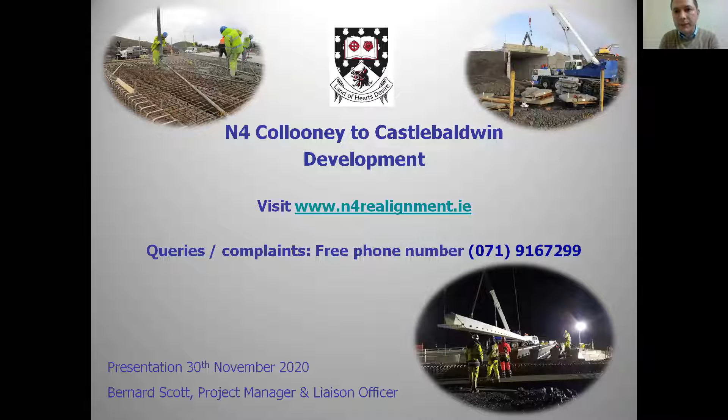I'm delighted to be in a position to give this presentation at this stage of the N4 project. I suppose development of schemes of this nature, such as this N4 scheme in the northwest of Ireland, through planning, appraisal and onto construction, requires a huge amount of work, commitment, perseverance, diligence on behalf of everyone involved. And I would like to extend my gratitude to all concerned for their efforts in getting the project to this

stage. For my presentation, I'm going to give you a brief background on the project, and we'll touch on the following headings: the project location, project description, its status, existing conditions, the project background, Phase 5 enabling and procurement, and the Phase 6 construction key stakeholders.

So the proposed scheme constitutes the remaining portion of the N4 in County Sligo requiring improvement. The project should provide 14.7 kilometres of Type 2 dual carriageway between the existing dual carriageway at Collooney and the end of the Curlew bypass, as Rona said there earlier. This consists of 2.7 kilometres of the existing single carriageway being upgraded to a Type 2 dual carriageway from the N4/N17 roundabout to Doorly, and 11.2 kilometres of offline Type 2 dual carriageway between Doorly and the proposed

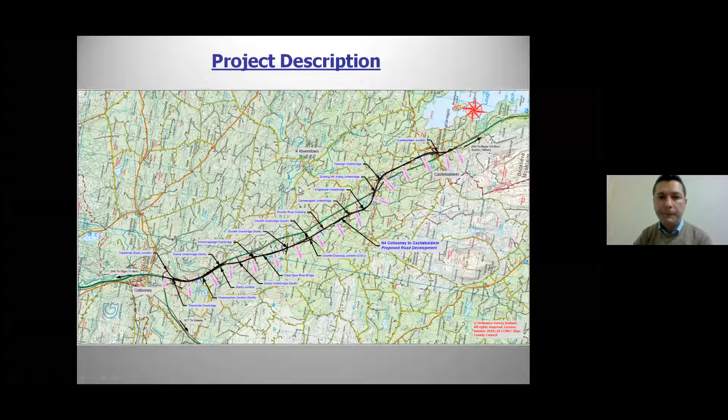So this image here shows the roundabout at Toberbride, the N17 coming in from the west side, the existing N4 dual carriageway coming in from the north. This is the existing N4, which will be upgraded to a Type 2 dual carriageway. And we have an east-west link, which was a link road going into the Tuberbride Business Park, which will now become a live public local road, which is referred to as the east-west link, which will provide a link over to a parallel road.

So this is the continuation of the parallel road, which is the Eastern Parallel Link Road. It's currently live to the national road traffic at the moment. It ties in with the existing N4 just at the top of the photo there. There's an underbridge coming across at this location to link up with a roundabout, which serves as a link to the Western Parallel Link Road. And both of these parallel roads are required to serve the local landowners and the areas surrounding this, like Riverstown, Clunamahan, and surrounding townlands and hinterlands.

This is the existing N4, which will be upgraded to a Type 2 dual carriageway. This photo was taken approximately in the beginning of November. So you can see construction is ongoing at the moment to get it across this underbridge.

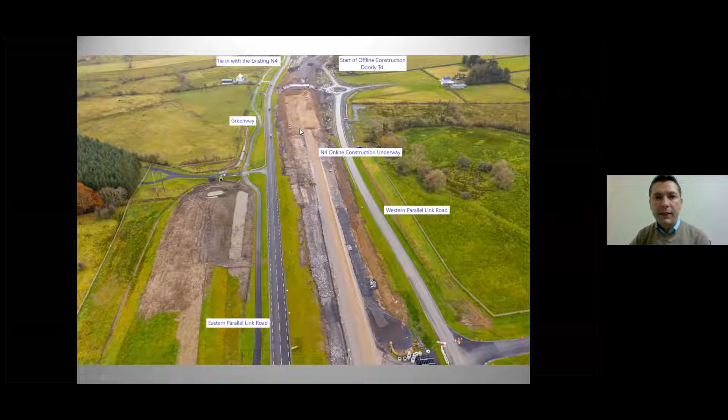So in terms of cross-section, the cross-section of the N4/N17 from the N4/N17 Toberbride roundabout to the Castlebaldwin junction should be a Type 2 dual carriageway, which has a capacity of 20,000 annual average daily traffic.

The cross-section from the Castlebaldwin junction to the existing N4 tie-in, which is approximately 0.78 kilometers, shall be a type 1 single capacity of 11,600 annual average daily traffic. The type 2 shall consist of two 3.5 metre lanes in both directions, separated by a central median, which contains a double-sided barrier. There is also a hard strip of 0.5 metres and a hardened verge of 1.2 metres on each side of the carriageway.

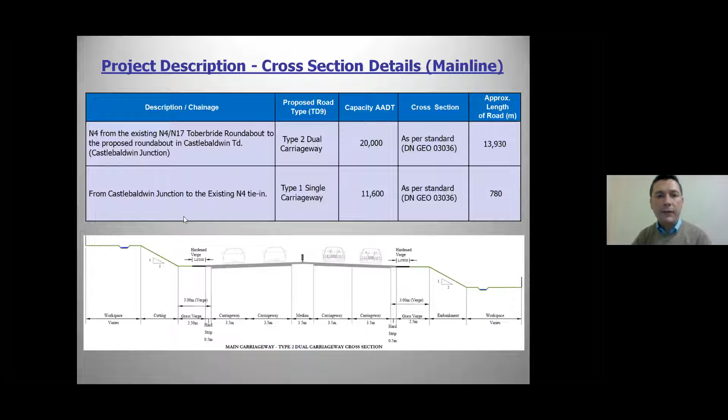To allow for breakdowns, parking bays will be provided at intervals along the alignment. These parking bays shall be 20 metres in length by 3.5 metres in width, with 40 metre lead-in tapers and 25 metre lead-out tapers. These will be evident in the drone video, which will be shown by Sean later on in the presentation.

So the project status: the project is currently at phase 6 and it's been developed in accordance with the TII project management guidelines, or Transport Infrastructure Ireland's project management guidelines. These guidelines provide a framework for a phased approach to the management and delivery of national road projects. There are 8 phases, phase 0 to phase 7 at present. And as is mentioned, this project, I'm glad to say, is at phase 6 at the moment.

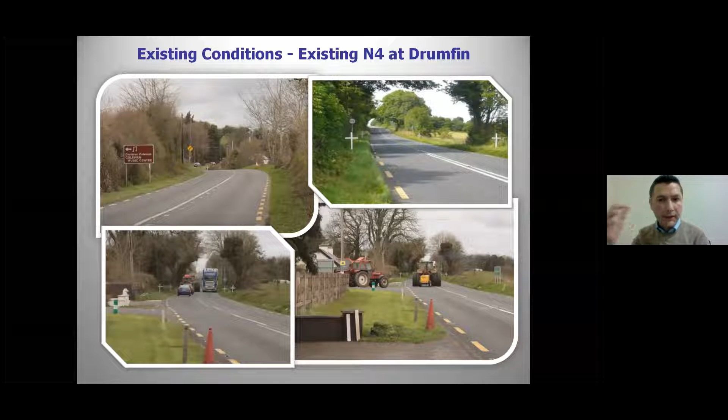There are approximately 70 houses with direct access onto the existing road. And more dangerous than that, there's approximately 160 field entrances serving land holdings along this stretch of road. So some of the key objectives of the route are to significantly improve the safety of the road, which has unfortunately seen over 30 fatalities in the last 40 years or so, which are evidenced by crosses that were erected some years back by an action committee.

Another objective is to provide a corridor of transport infrastructure that will encourage and support investment and employment in Project Ireland's National Planning Framework designated Regional Urban Centre of Sligo in the northwest. It's also an objective to improve journey time and journey time reliability, to improve road-based transport, quality of life for residents, and improve accessibility to work, education and other activities, and also to improve conditions for pedestrians and cyclists.

In terms of the project background, planning and land acquisition, all statutory documents and preliminary designs for the proposed development were developed by the National Road Project Office of Sligo County Council and lodged with An Bord Pleanála in December 2013. Following a 3-day oral hearing in April 2014, the EIS and CPO were confirmed in July 2014 without any modification. Sligo County Council confirmed the scheme in August 2014 and following approval published the notice to treat and the notice to enter.

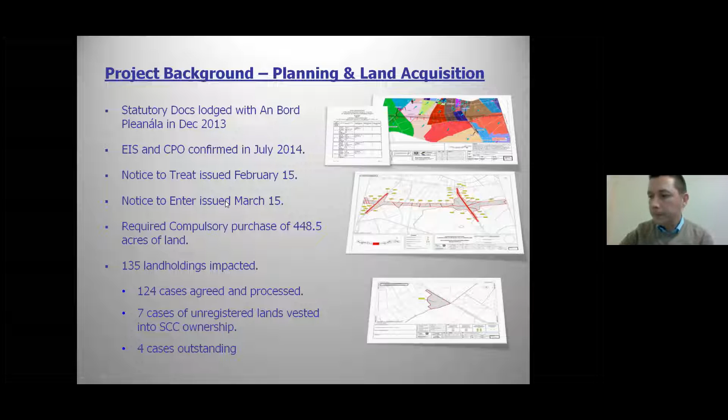In terms of advance works, following An Bord Pleanála's confirmation of planning, Sligo County Council National Road Project Office continued to manage these. Possession was taken in Q2 2015 to enable advance works to commence, and all necessary advance works were prepared, tendered and managed directly by Sligo County Council's National Road Project Office and completed from 2015 to 2017. They included fencing and clearance, house demolition, archaeological testing, ground investigation, ESB 110 kV pylon and 220 kV pylon construction.

The fencing and hedge clearance contract was completed in Q3 2016, and this included approximately 40 kilometres of timber post and rail fencing, approximately 290 agricultural gates, and all necessary tree and hedge removal works. So as part of the scheme, there were 16 houses required to be acquired, mostly along the online section. 12 have now been demolished and 3 are now boarded up for resale post-construction, and we have 1 that we're awaiting vacation.

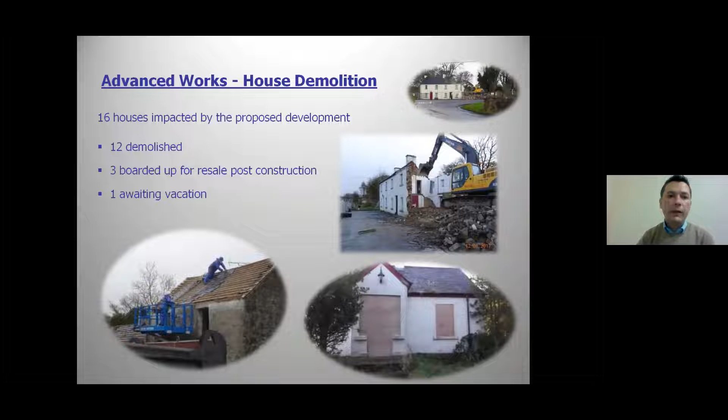In terms of archaeology, as you probably all are aware, Sligo is extremely rich in archaeological features. So advance archaeological contracts were carried out on the CPO lands from Q3 2016 to Q1 2018. These contracts resulted in the discovery of 35 archaeological excavation areas, mainly ranging from the prehistoric to the early medieval period. 3 large-scale sites were discovered, 2 of which were highly significant archaeological sites, consisting of prehistoric, Bronze Age, Iron Age, ceremonial, burial and habitation complexes.

And the 3rd was a large multi-period site with prehistoric burnt mounds and an extensive trackway system. 29 fulachtaí fia and 4 prehistoric habitation sites were also discovered. 2 large-scale previously unknown archaeological sites, which consist of an early medieval ring fort with souterrain and a prehistoric palisade enclosure site, were preserved in situ.

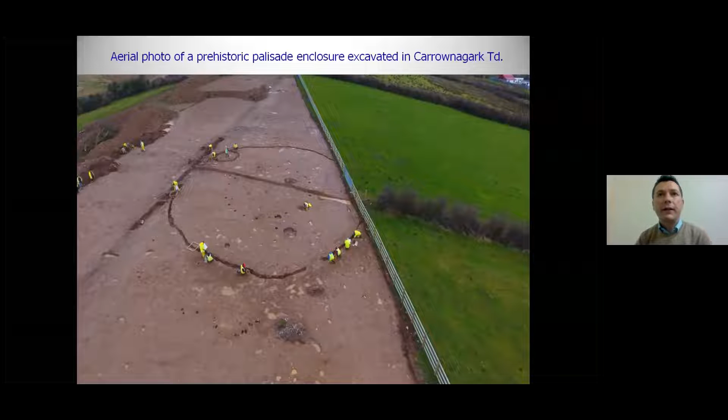So as part of the advanced works, there was also very detailed ground investigation carried out. I won't go through the list, but you can see them there. It was very thorough, and this led into the detailed design for the scheme.

There was also a diversion required for the 110 kV power line in the townland of Tubberbride, which required construction of 2 angle masts and 2 pole sets. It was also necessary to construct a transmission tower in Clonlurg to achieve adequate clearance for the proposed road development under the Flagford-Srananagh 220 kV overhead line.

So for phase 5, enabling and procurement, a tender process was undertaken to appoint consultants to assist in the progression of the remaining phase 5 works, in addition to provision of technical support to Sligo County Council for phase 6 and phase 7 of the TII project management guidelines. Halcrow Barry, now Barry Transportation, were awarded the contract in Q2 2017.

A contract notice for the main construction contract was published on e-tenders and the Official Journal of the European Union website, commencing the pre-qualification process for a construction contractor in Q4 2017.

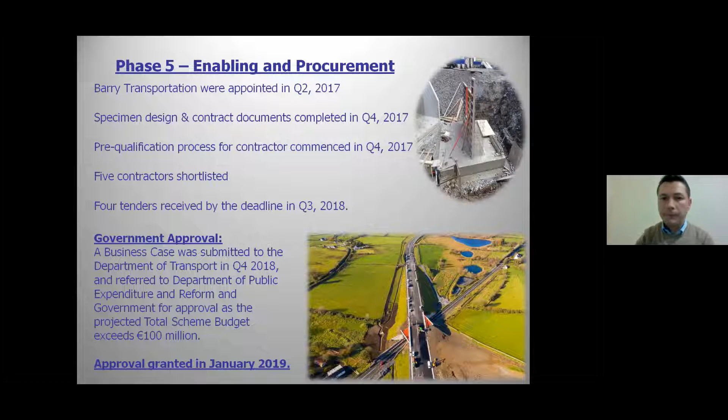In terms of the phase 6 construction, Roadbridge were appointed the contract in January 2019 for a contract value of 80 million inclusive of VAT. The contract type used is a PWCF4, which is the public works contract for civil engineering works designed by the contractor. Construction commenced in March 2019. And taking the COVID closure period into account, the programmed road opening date is now Q3 2021.

And finally, for me, to summarise the key stakeholders involved in the scheme, the sponsoring agency is Sligo County Council. The employer's representative is Barry Transportation Limited. The sanctioning authority is the government through the Department of Transport and Transport Infrastructure Ireland, and the main contractor is Roadbridge. Their design consultants, as Rowan has already outlined, are a conglomerate of Feely Timony, Clandillon, Byrne Looby, and Ramboll.

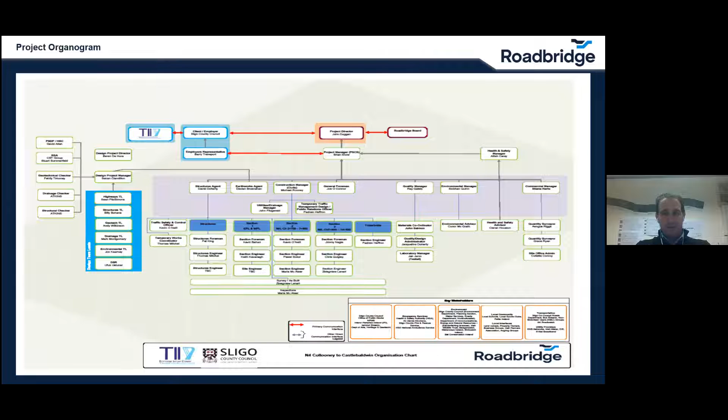Labour and resources. At present, we have about 150 people on site, broken into direct labour, hired labour, and subcontracts. During the peak summer months, we had over 265 people on site with over 100 items of plant. The plant varied from 80 to 5-ton excavators, dumpers, dozers, rollers, and graders.

You will see from the high level numbers, which gives an indication of quantities of various materials in the project. In total, we had 1.8 million cubes of cut material, with almost 1.1 million of unsuitable generated from these cuts. 1.2 million cubes of fill material for road embankments. On-site testing of materials carried out to determine what was suitable for placement in embankments.

A major challenge was managing disposal of the unsuitable material, all of which was disposed of on-site within the land made available, negating the need to haul off to off-site landfills. Environmentally, it was a huge benefit. Unsuitable material was placed in deposition areas and used for backfilling borrow pits where suitable class 2 or rock was generated. During the course of construction, we developed 2 on-site borrow pits where we blasted and processed 1C and 6F2. We'll point these out in the aerial footage, which we will play later on in the presentation.

Drilling and blasting and crushing works were carried out by a specialist contractor, with pre-condition surveys carried out on all surrounding properties prior to blasting commencing, with a post-condition survey following completion of the works. Generally, all properties were surveyed within a 500-metre radius of the borrow pit. A detailed analysis was compiled after each blast report, following reports from the vibration monitors, which were set up at various locations.

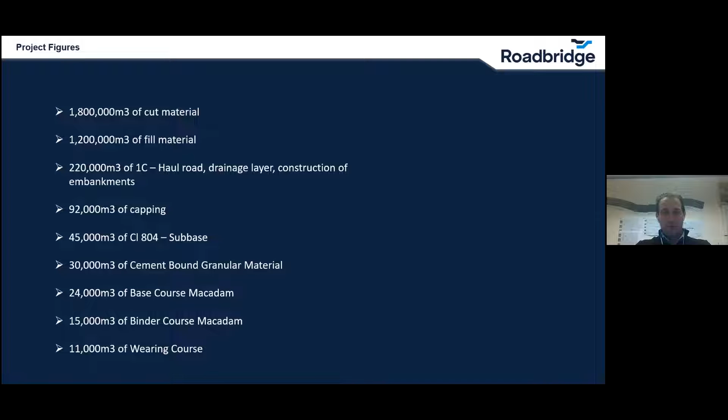Earthworks mass haul, which would have been produced at project commencement to ensure the most efficient haul distance used for cutting and filling material. The screen is a snapshot of the mass haul on the N4 project. Poor ground conditions and weather proved a major challenge through the construction of the road embankments, with depths of peat ranging from 2 to 8 metres.

And peak construction during the summer of 2020, we were hauling on average 100,000 cubes of material per week, which is quite significant. Bulk earthworks would generally run from April to September. The key, of course, to achieving these quantities is weather. Being in the west of Ireland, to date it has been one of the biggest challenges we've met.

There are 12 structures on the project. The first 2.5 kilometres of the N4 south of the N4 N17 roundabout is online. Within this section of mainline, structures 1 and 2 are located. Diversion of the N4 traffic onto the EPL was required to allow construction to commence, and this diversion was open to N4 traffic on the 7th of September. I'll just touch on it later on. All other structures were accessible at project commencement.

The design of local roads, local structures were offline and allowed for the local road to remain in place until the final tie-in was planned. A temporary closure was then ordered to complete the tie-in and divert road users onto the new alignment. We currently have 10 of the 12 structures complete and opened to the public.

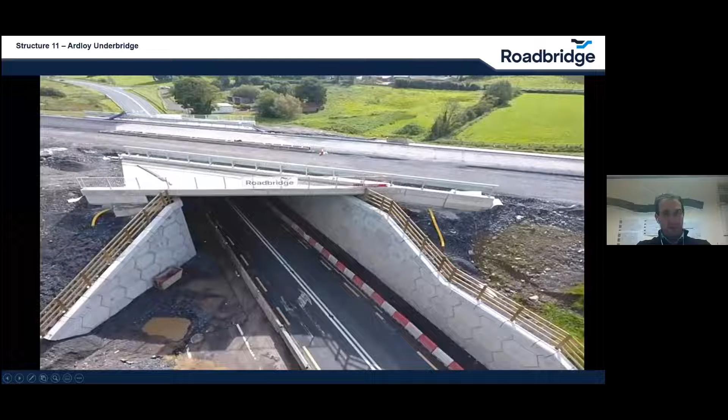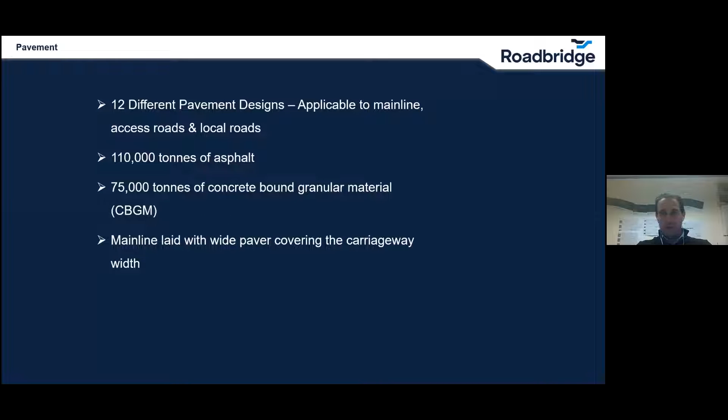Pavement: there's 12 different pavement designs applicable to mainline, access roads and local roads. Approximately 110,000 tonnes of asphalt, 75,000 tonnes of cement-bound granular material. Mainline was laid with a wide paver covering the carriageway width. Lagan Asphalt are a specialist pavement contractor who are appointed to deliver both CBGM and asphalt layers. Both materials were placed with the full width paver, which increased production, eliminates longitudinal joints, and is more efficient compared to a standard paver. You'll just see the wide paver in use on the mainline base course back in September.

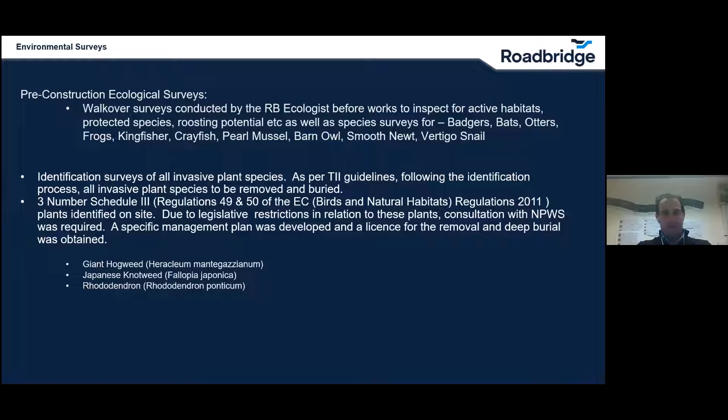Environmental surveys. Roadbridge have a dedicated environmental officer on site since project commencement. Pre-construction ecological surveys conducted by Roadbridge's in-house ecologists before works commenced to inspect for active habitats, protected species, roosting potential, etc., as well as surveys for badgers, bats, otters, frogs. Identification surveys of all invasive species, all of which were removed and buried, and three scheduled plants identified on site, which are giant hogweed, Japanese knotweed, and rhododendron. A specific management plan was developed, and a license for the removal and deep burial was obtained.

Environmental surveys: walkover surveys of works during bird nesting season. Construction ecological surveys include walkover surveys, Q value annual surveys, including macroinvertebrate surveys of 11 watercourses to determine water quality using the Q value system. Survey results compared year on year to determine impact of construction works, be it negative or positive, on receiving water bodies.

Camera surveillance to counteract the removal of a number of badger setts within the LMA. An artificial sett was created at chainage 11.8. This sett is monitored with a trail camera to determine its success. Electrofishing of stream diversions following completion of stream river channels. Electrofishing completed on abandoned sections of the channel.

Furthermore, environmental surveys: dust monitoring with 12 number dust monitoring stations throughout the project at cardinal points such as road crossings or close to nearest sensitive receptors. Groundwater monitoring surveys: there's 12 number groundwater monitoring locations, with water level monitoring weekly and physiochemical testing quarterly. Surface water monitoring: 11 number watercourses on site.

It was daily inspections, physiochemical testing monthly, drinking water monitoring, 4 number private well locations sampled and tested biannually, and pre and post radioactivity testing undertaken on drinking water reservoirs closest to blast locations.

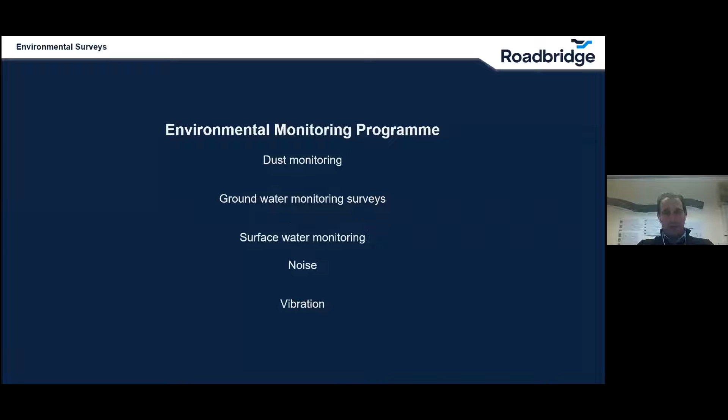Noise: daily noise monitoring conducted at nearest sensitive receptors to works areas, and daily vibration monitoring conducted at nearest sensitive receptors to works areas. Continuous vibration monitoring conducted at Tubberscanavan House, which is a derelict structure listed under the National Inventory of Architectural Heritage. Blast vibration monitoring is undertaken within the blast radius and also at private properties within 1 kilometre of the blast.

As mentioned earlier, weather has been a huge challenge in the project. Water management: specific plans developed with input from the construction team. Settlement ponds were constructed, a permit pump system in place, which is authorised and controlled by the environmental manager. We also have a dedicated environmental team on site.

Dust management: we've reduced the site speed restrictions, dust suppression with water bowsers, and we've also 12 number dust monitoring stations. Noise and vibration monitoring undertaken at nearest sensitive receptors. Activities deemed to be noisy were monitored closely, and if results obtained indicated levels were elevated, mitigation in the form of noise barriers or screens was installed.

Eco mitigation: artificial badger setts installed along with bat boxes. Preservation of an area within the LMA as habitat for the marsh fritillary butterfly, and electrofishing of abandoned channels.

Opening of the EPL: as I mentioned earlier, it is critical to get this open to work on the 2.5 kilometre online section of the main line, which included structures 1 and 2. You'll see at the top of the photo there the existing N4, the N4 N17 roundabout, and as Bernard mentioned earlier, the east-west link leading onto the east link, which will take you back towards Collooney.

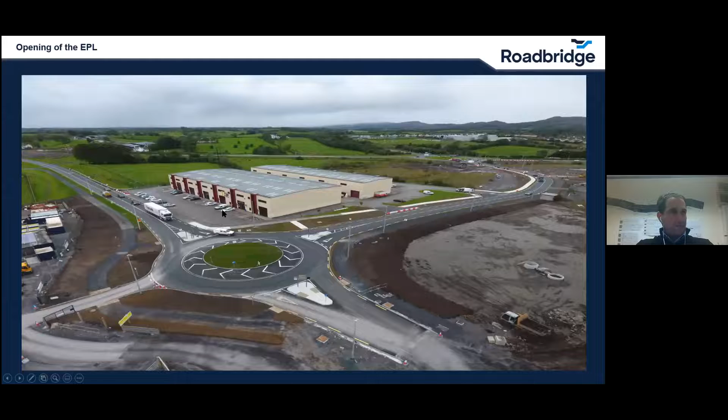It's an aerial photo looking north, roughly chainage 2300. You can see drainage works, culverts, some widening works, and in the background, structure 1, and a good view of the Greenway and the EPL, which is currently taking the N4 traffic.

Again, a photo from the same location looking south. The west link on the right hand side of the photo, with the east link taking the N4 traffic on the left and the main line under construction in the middle. This photo was taken back in September, so works have progressed since then.

Structure 2 box culvert in the background. There's about 75,000 cubes of fill material required. That embankment is now complete, and we're progressing with drainage and substructure layers, with pavement to follow early next year.

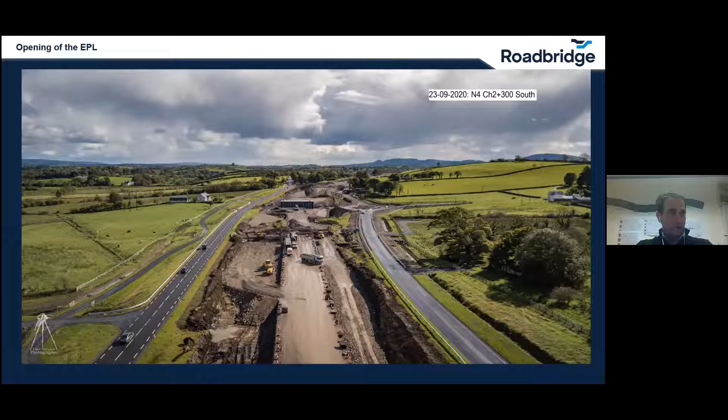Roadbridge are a registered partner of the Considerate Constructors Scheme and agree to the code of practice in all our schemes. It is broken down into 5 categories: care about the appearance, respect the community, protect the environment, secure everyone's safety, and value the workforce.

I suppose, like all aspects of life, managing COVID-19 has been a big challenge during 2020. Following the reopening of construction sites, our approach to how we deliver works on site has changed significantly as a result. There are a number of guidelines and policies that now must be followed to prevent spreading of the disease: the CIF COVID-19 Standard Operating Procedure and the CIF Guide on Social Distancing.

Roadbridge have also developed a suite of policies and procedures that are in place through all our sites. These include Standard Operating Procedure Management of COVID-19, COVID-19 preventative policies for offices and sites, and COVID-19 site-specific management plan. To date, the policies in place have worked really well and provide a safe workplace to all employees on site. And with the recent positive news on vaccines, hopefully we'll slowly get back to some bit of normality over the coming months.

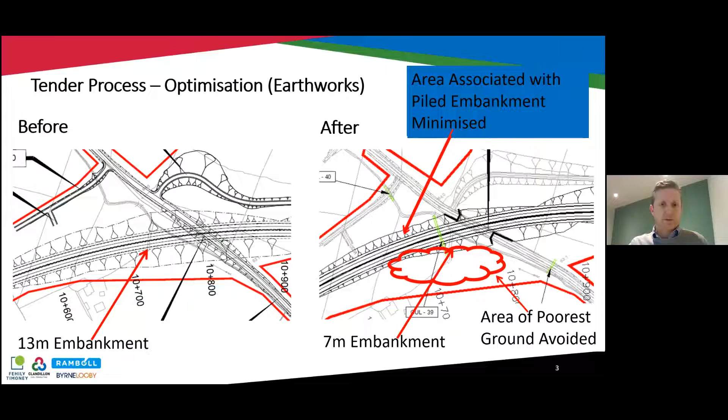Sorry, this is just that element of design brought to life. So always nice to see your work come to life like that. Just this area here is the area where the 13-meter embankment was to go. Obviously, very significantly reduced, and hopefully an improvement for the scheme.

Just on the detailed design, then I'm just going to talk you a little bit through the alignment design, the drainage design, pavement design, geotech design, and the structures design. So a significant focus on any of these schemes once you start the detailed design of the alignment is first and foremost to provide a safe alignment, but also you're going to look to optimize the earthworks. We were successful at the detailed design stage of increasing the suitable material that was generated from road excavations by 176,000 meters cubed versus the tender design. And we also decreased the bulk fill by approximately 140,000 meters cubed versus the tender design.

Overall, compared to the employer's specimen design, there was approximately 30% reduction in bulk earthworks, and the scheme was ultimately balanced through the use of on-site borrow pits. Just some of the principal volumes, Brian ran through them earlier on, but obviously very significant. So there's approximately 1.5 million meters cubed of cut, including the soft material that needed to be excavated. 760,000 meters cubed of unsuitable material that was at tender stage, and before some of the bad weather kicked in, so I'd imagine it went north of that. And just over 1.1 million meters cubed of embankment as well. So obviously very significant volumes, as Brian mentioned.

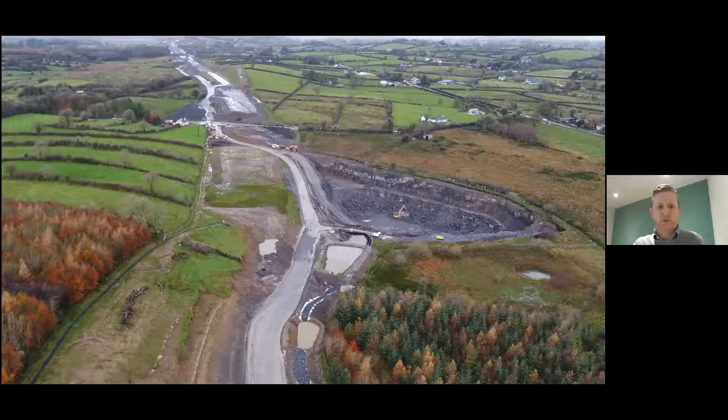This is just one of the borrow pits. So I mentioned that the road itself traversed through quite soft ground typically, and there was practically no rock, in fact, underneath the road alignment itself. So all the rock that was generated on the site was generated through borrow pits. So just to give you a quick scale of the size of it, just a quick video there to show you some of the rock being excavated out of the borrow pit. I don't know if you get a true appreciation of the scale of them, but you can also see a supervisor standing at the top of that, which gives you an impression of the depth of these borrow pits.

Okay. Just on the alignment then, one of the other things that we sought to do: Bernard and Brian have mentioned the 3-kilometre eastern parallel link that runs adjacent to the new N4 on the northern section of the scheme. So we propose to move the footpath that was shown here out to the fence line. So there's a before and an after shot there. Just move the footpath out to the fence line.

So the benefit of that change was to increase the amenity and the safety for users of the Greenway, but also reduce the earthworks and the drainage works for Roadbridge. Got rid of this curb, and we were able to use sustainable SuDS drainage systems. So that sort of proposal and others like it were progressed through the variant conceptual design process. So we put together a technical note along with justification, some graphics.

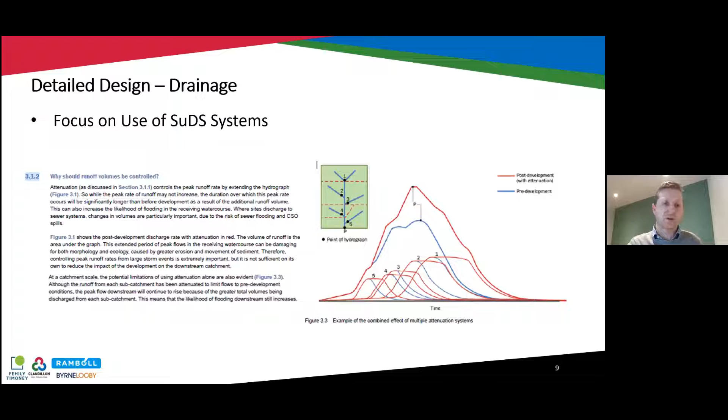So just on the drainage design then, right from the outset of the scheme, we placed a fairly heavy emphasis on the use of SuDS systems. The graphic shown in the presentation slide there is just an extract from the SuDS manual. So typically, we're all pretty good at controlling the runoff rate from these large developments. But SuDS systems are necessary in order to help you control the runoff volume, obviously increasing the paved area and reducing the permeability of the ground. So it's also important that you consider the runoff volumes when you're developing the drainage design.

One of the SuDS systems that we used, which might be of interest to people, is a lined grass surface water channel. Typically a grass surface water channel is placed in the verge, collects surface water runoff and cut slope runoff. In some instances on this scheme, possibly about 6 or 7 kilometres of it, we've used a lined grass surface water channel. So an impermeable liner is added underneath the base of the channel, obviously to make the system impermeable. And you do that where you may otherwise have a groundwater vulnerability issue or to prevent the risk of karstification.

So in order to use that detail, we had a departure granted. That departure was granted based on the contents of the environmental impact statement for the scheme, which called for the use of lined grass channels. We also had contract requirements that required the use of SuDS systems throughout. The detail itself was developed bearing in mind past experience.

So anecdotally, we had heard that this system wasn't favoured because of problems on past schemes. The problems that we heard, again, this is just anecdotal, but we had heard that the liner had been punctured on some schemes, that the liner hadn't been connected into the pavement. Possibly the details around the chambers hadn't been bottomed out. So they're all issues that we sought to solve to bring this proposal forward.

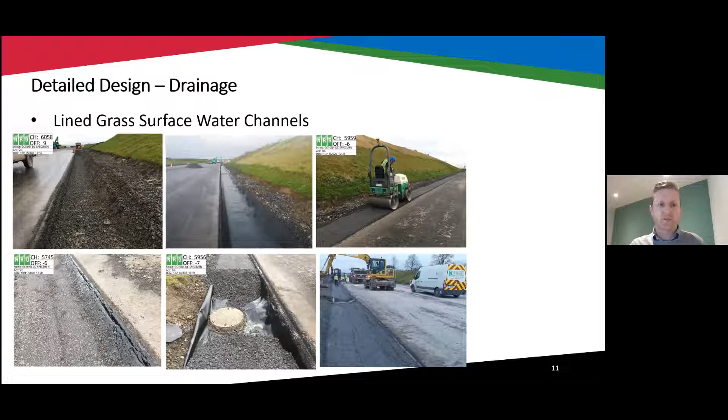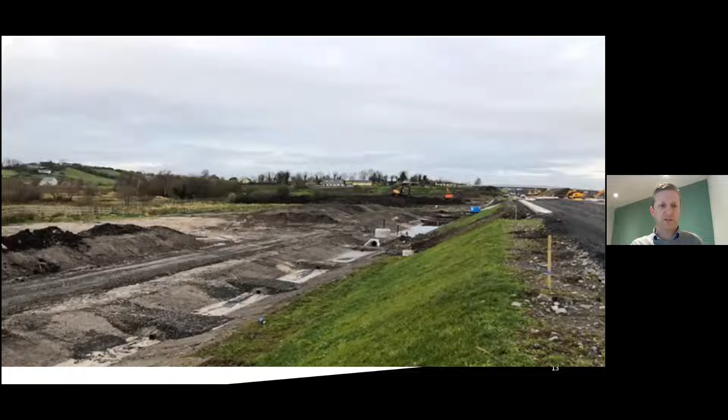Okay, a couple of photos of them coming to life here. So again, you can see them at the base, just at the base of the embankment. You can see the check dams being constructed. Obviously, a little bit of work to finalise these. But once they're done and landscaped, actually, we think that'll be a nice feature of the scheme.

Okay, geotechnical design then. I think we've mentioned earlier that originally at tender there was due to be about 760,000 meters cubed of unsuitable material. Like I said, it's probably gone north of that given the poor weather. Largely peat, also marl and alluvium, and typically through 90% of the project there was a dig and replace methodology employed.

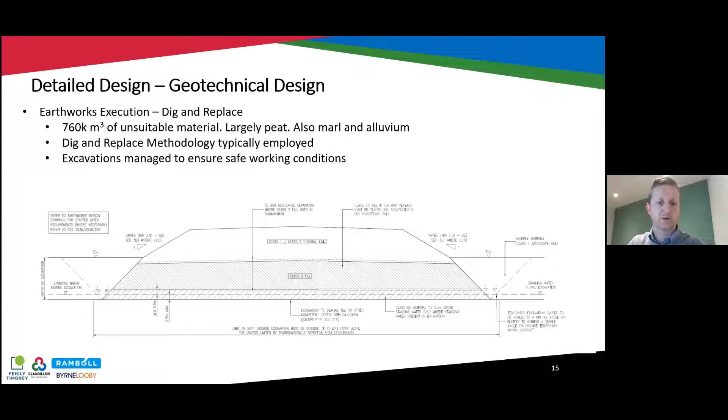So some people will probably be familiar with the typical details shown on the slide there. Effectively, you excavate all peat material and any soft material out until you reach a competent foundation, proof roll it, and then start backfilling. So if there's water present, you need to backfill with stone. Once you're out of the water, you can start backfilling with class 2 material.

Okay, so I mentioned 90% of the scheme; for the other 10%, probably slightly less, a different solution was employed. So just on the very southern tip of the scheme, vertical drains and surcharging was employed to deal with the soft ground. So first and foremost, all organic materials, all the peat was removed. At that stage, there was still marl and alluvium up to 10 meters deep at the worst point; probably 6 or 7 meters would have been typical.

And in order to deal with that, you effectively want to make sure that all the consolidation happens in that soft material prior to you placing any pavement materials. So a surcharge embankment was placed on top of the soft material, 2.5 meters high, and vertical drains were installed at 1 meter centers on a triangular grid. The initial design surcharge period was 7.5 months. That was ultimately brought down when the monitoring installed showed that all the primary settlement had occurred.

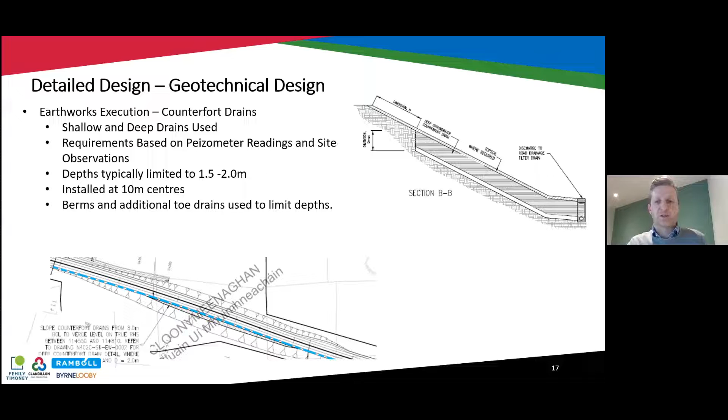Okay, onto the pavement design. As Bernard and Brian were mentioning, there's approximately a 3 kilometer section where we are following the line of the existing N4. Only 2.5 of that is online. Just at the end of that, we go over an overbridge. So obviously, we're grade separated from the existing N4. For 2.5 kilometers, it is online horizontally and vertically.

We did quite a lot of playing around with the alignment just to try and get it as close to the existing alignment as we could, and thereafter sought to use an overlay design for that online section. So that started with scheduling a suite of testing. So the testing included falling weight deflectometer tests, cores were taken, ITSM testing and DCPs were done, and a visual assessment of the existing pavement was also done.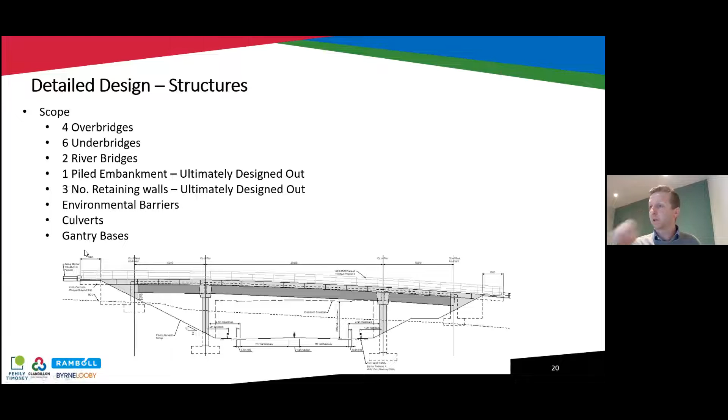Okay, so just to show you some of the construction of the overbridges. You can see there the columns going up, column bases installed, and the abutment bases installed, with the abutments being constructed. We jump on a couple of months. You can see now the abutments are largely complete, waiting to be backfilled. The precast concrete beams have all been landed, and the in situ deck has been poured.

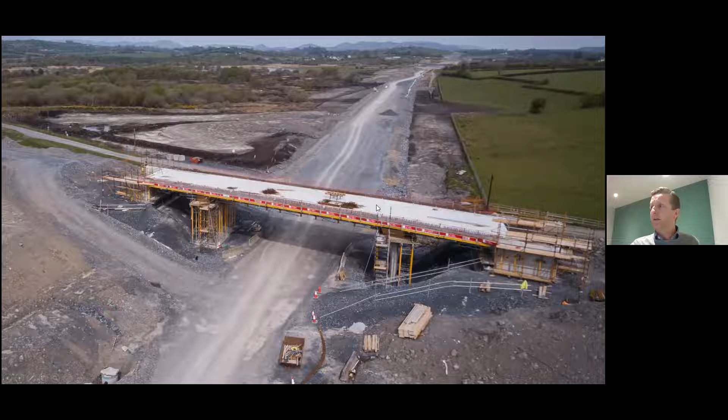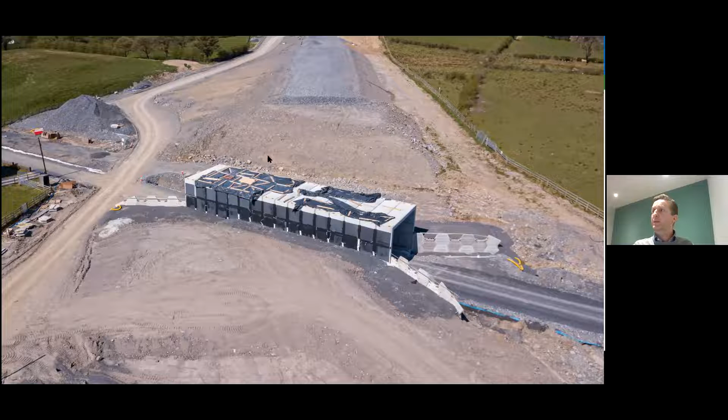Okay, and just to finish up then, there's just a shot of one of the box underpasses going in, all precast units delivered and assembled on site, and earth retaining wing walls. Okay, so that's the end of the presentation, and now hopefully I can share an overview with you, a fly through.

So hopefully you're able to see this. Somebody could just confirm. Yep, that's grand, Sean.

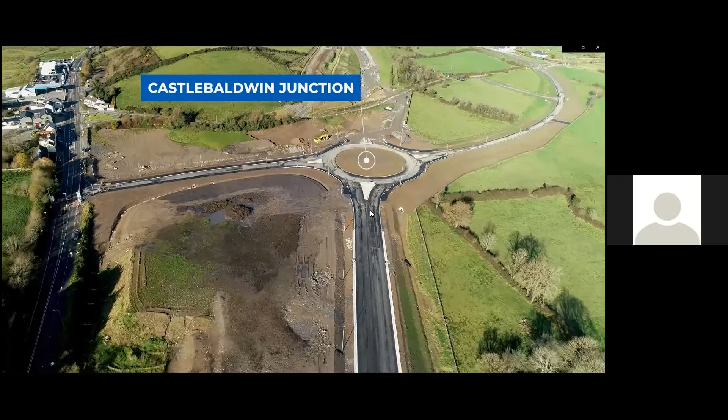Yeah. This is just a fly through taken a couple of weeks ago from the south of the scheme heading north. And immediately you can see here, this is the area of vertical drains. So you can see where the surcharge material was placed to load the embankment and subsequently taken away. So I think, Brian, that surcharge embankment was left in place for 5 or 6 months in the end. That's correct, Sean. Yeah, in place from March, and it was released in July, August of this year. The last thing to be done before COVID rules kicked in, I think there was a rush on just to get that surcharge embankment in place prior to shutdown.

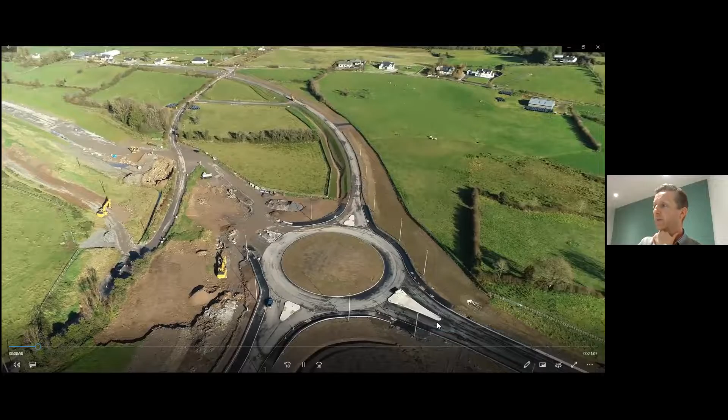Correct, yeah. Castlebaldwin roundabout here. So as Bernard mentioned, this is the location where we move from the single carriageway section into the type 2 dual carriageway section. That side road has been opened as well for the last week and a half or so, so it allows us to dig out the plug in the main line of the existing road, which is ongoing at the moment.

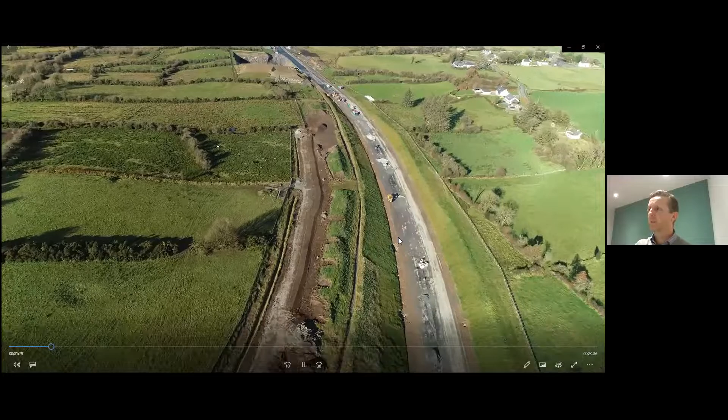The largest cutting on the scheme here. There's actually a surplus of materials down on this side of the job, so I don't recall that we did a huge amount with the alignment on this section. If anything, we were probably trying to raise it slightly through that cutting. Access track being constructed there at the top, and you can see the pre-earthworks drainage at the crest of the cutting.

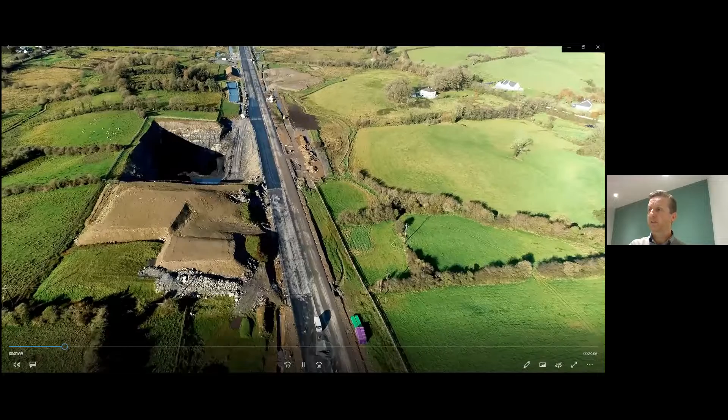Just up on the left here, one of the larger borrow pits on the scheme. So obviously very significant rock excavation there. How long have you been at that excavation, Brian? Since we returned from lockdown, so we're looking at late May. Actually, we've exhausted the material out of it, what our requirements were, and backfilling operation commenced last week. So the intention is that hole will essentially be filled up to road level once complete.

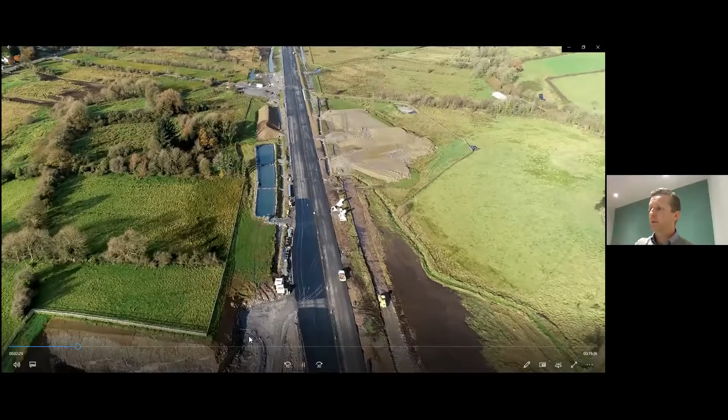See the settlement tanks here as well. So a pump is set up obviously down in that quarry, pumps it out to the settlement tanks, and the water runs through that prior to discharge. Always interesting to see how effective they are. Typically the water comes out quite clean.

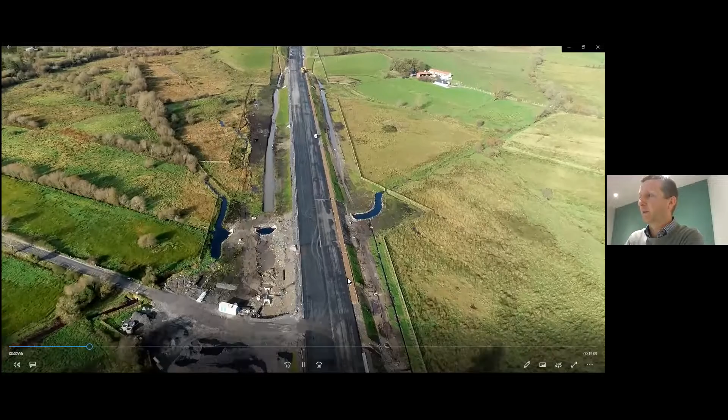I did mention that we use SuDS systems. There are some concrete systems still on the scheme, typically provided to isolate any surface water runoff from outfall. So they'll be taken 50-60 meters away from the outfall, so that they're brought into the system, the attenuation and pollution control systems, to give them time to treat them. See the verges, I presume that's the verges being topsoiled there, is it? That's correct, yeah.

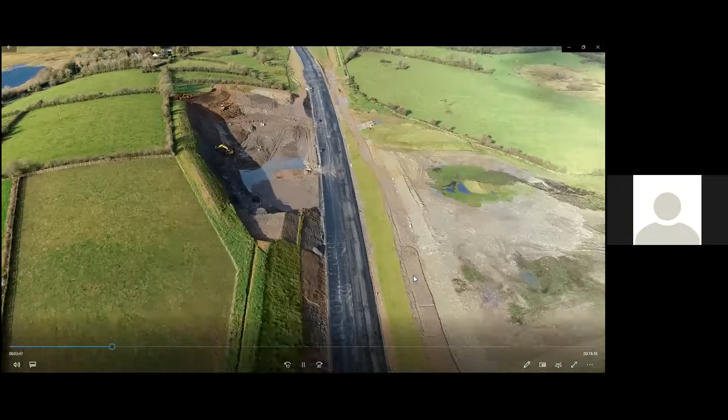Progressing, I suppose. Passing bay on the right, yeah. 11 number laybys in the project throughout the length of it. On the right, you'll see a deposition area where soft peaty material is stored within the land made available. And on the left, another borrow pit where we won Class 2C material for building the road embankments. Again, another lay-by on the left-hand side.

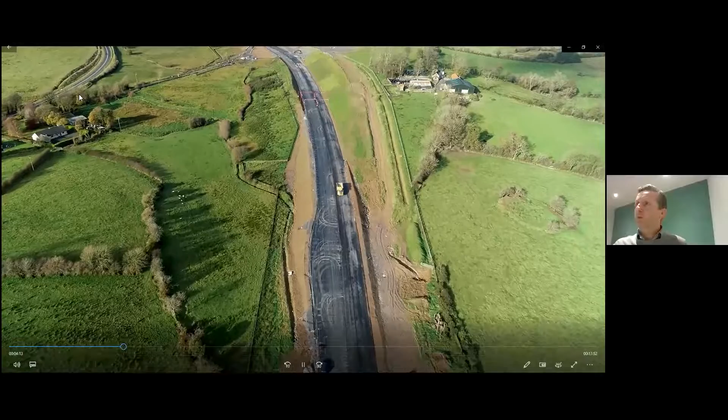So this section would have been quite visible for people travelling on the N4. See the cutting into the hill. Just to give you an indication of the topography of the ground, on the right-hand side we had a cut of 7 meters, and on the left-hand side maybe a cut of a meter and a half. So quite significant side slope on that particular embankment itself. And on the right then is an access road that's currently under construction in off structure 12 there, which is just in front of us.

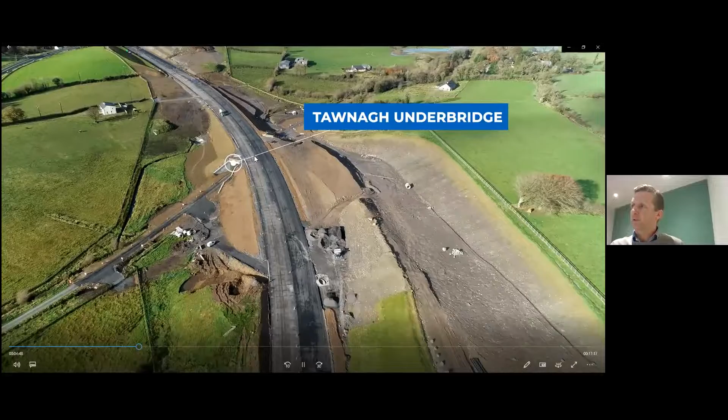Just coming up to Tawnagh underbridge here. So this is the area that I was mentioning earlier. Precast box structure, obviously, and this is the area where we reduced down the size of the embankment. So we were able to reverse the longitudinal gradient of the road, which was rising in the specimen design. We were able to reverse it, so it was coming down towards the structure as opposed to rising out of this cut. Bring down the embankment and obviously get rid of that piled embankment that was due to be there.

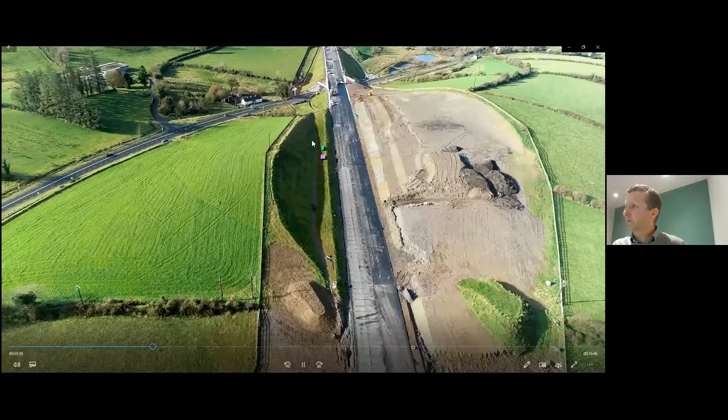You can see drainage in the toe of the slope in this location. Both verges have ducts all the way along as well. Ducts lined up there ready to be installed. It's the existing N4. So we were talking about this structure earlier, reinforced earth structure, obviously. Bank seats sitting directly on the reinforced earth.

Brian was mentioning that the road was kept live, no closures at all, was it? So the beam lift was December of 2019. It was carried out over 2 nights, and there was an all stop in place for the period it took to lift on each beam. So no road closure in place. Traffic was maintained at all times. So it was a positive story.

Just off to the side there, you can see existing attenuation ponds. Those ponds are associated with the existing N4, and this is Ardloy Lough. This whole area was one of the environmentally sensitive areas on the scheme. You can kind of see the extent of it almost from the colour of the ground. That sort of brown area is the wetland that was determined to be environmentally sensitive. A number of design and construction requirements associated with protection of that area, and you can even see the colour differentiation between one side and the other. The scheme just kind of skirted around the edge of it.

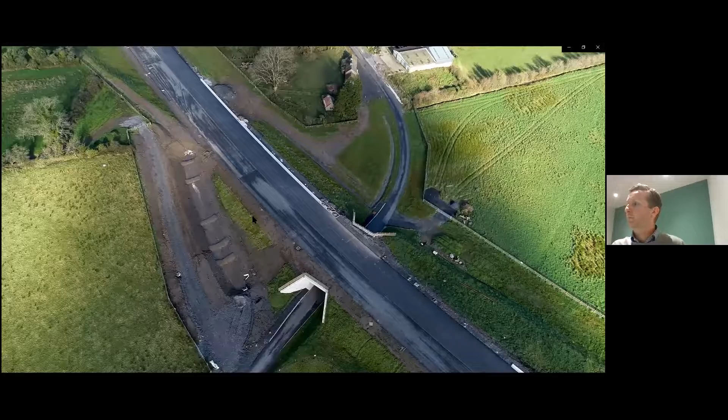Just coming up to the second of the borrow pits where we would have extracted rock on the right-hand side. This is a backfilled borrow pit. Again, generated a large volume of material out of it and disposed of the unsuitable material that wasn't suitable for building earthworks embankments into this area. So that's now complete.

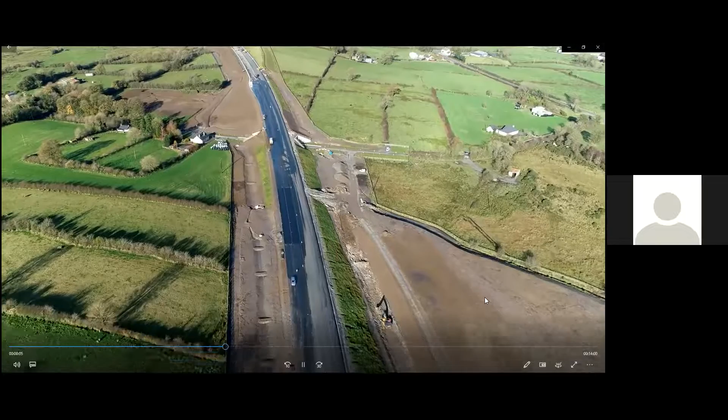And the borrow pit, that's the borrow pit that was shown on my presentation, a short video there. It's incredible to see. You wouldn't believe there's enough material on the job to fill it in, and you find you wouldn't be long filling it. And there are further swales on the left-hand side of the scheme, those ones looking particularly well. On the right-hand side there, lay-by.

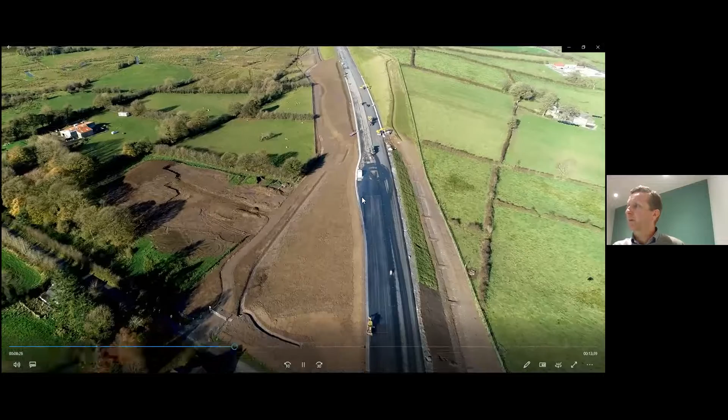Topside embankments. I think one of the things that I do see as I go through the flythrough is just how much every scrap of land was utilised as deposition. So you can see there's a large deposition area here as well, just building up, very well finished, I have to say.

So this embankment, Brian, would have been constructed on sloping ground, as you mentioned earlier. A very significant slope there, which if I recall does slow down the earthworks operations to some extent, having to bench it in. It does, yeah. I suppose we're just coming out of a cut into a wet area as we approach structure eight. So challenging at the best of times, the depth of excavate and replace and the topography of the ground.

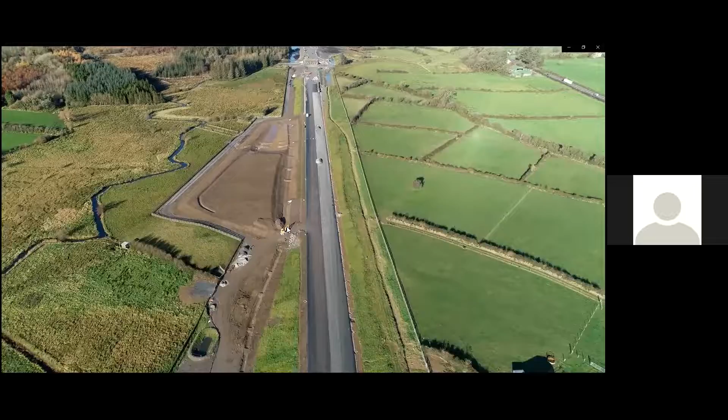This is one of the wetlands here that takes pipe network drainage as well as the surface water runoff. You see it comes down and then turns back on itself just to get that extra bit of storage space, widens out as it turns back on itself.

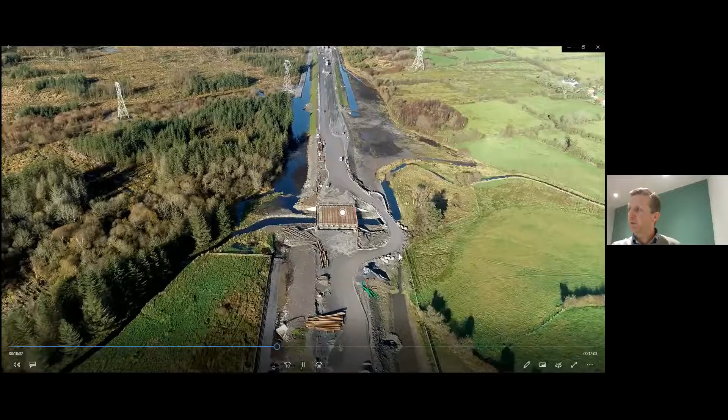Just coming up to the first of the two river bridges now. So this is structure 8, Drumfin River, 24 metre span, I believe. Earth retained structure, as I mentioned. Obviously, there was a temporary haul road Bailey Bridge installed prior to allow traffic get over the river in the temporary scenario. This whole area is prone to flooding, so you can see just how far the flooding extends.

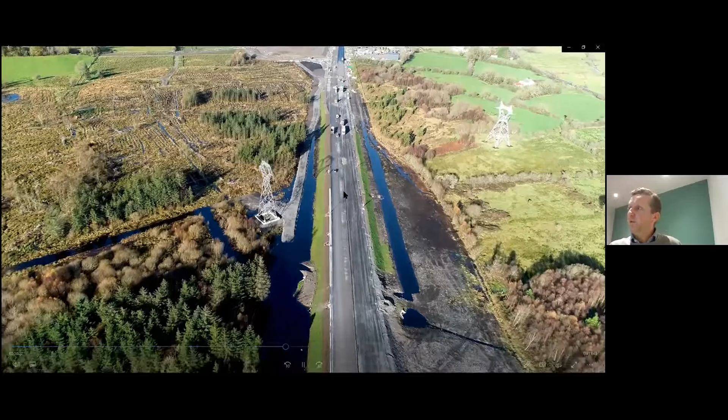So obviously a flood study was done for the road to ensure that it was sufficiently far above the flood level. Embankments are built with stone below flood level. Actually, even this access track is above the flood level. That wouldn't be typical of access tracks, but the access track itself acts as flood protection in this instance.

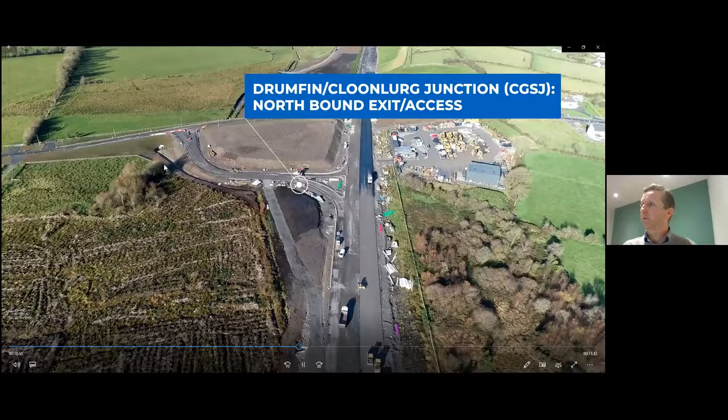Just coming up to Drumfin, Cloonlurg here. So this is the only grade separated junction on the scheme. 2 roundabouts, 1 grade separated junction. Compact grade separated junction, I should say. So it's just a T junction at the top onto the local road. Roadbridge mini compound here, but you can see the scale of these deposition areas that would have been more or less at grade.

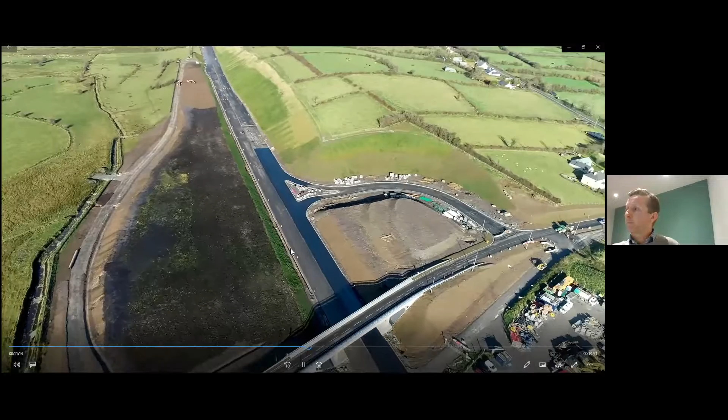It's also where the linear wetlands come into their own. Provision of the linear systems, where you do have space, handed back an awful lot of this area that would have otherwise been used up for attenuation ponds. Very neat finish up here as well.

What is it they say? Some of these excavator drivers, they could brush your hair with the bucket. What they say, Sean? They could brush your hair with it.

The mainline pavement is flexible composite pavement, so CBGM, and it'll have an SMA surface, so it's a low noise surface.

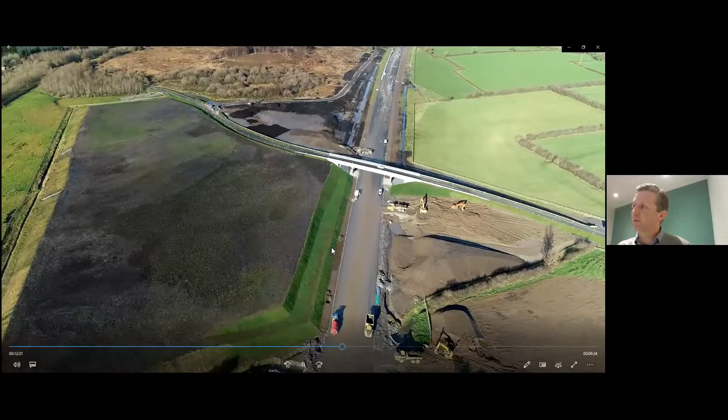Okay, just the size, the extent of the deposition area. This section of road would have been on a small section of embankment had it not been for the deposition area. And you can see that the deposition area comes up almost to the soffit of the overbridge. Again, that side road would have been on 4 or 5 metres of embankment. It's actually in cut. The deposition area is so extensive.

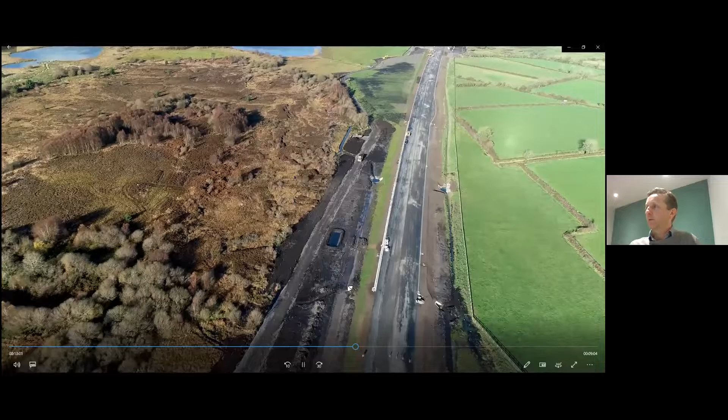This is another area where you have a linear attenuation system. You can see the double height, effectively, deposition area there, 4 or 5 metres high. Probably jump on here a little bit and keep us on track.

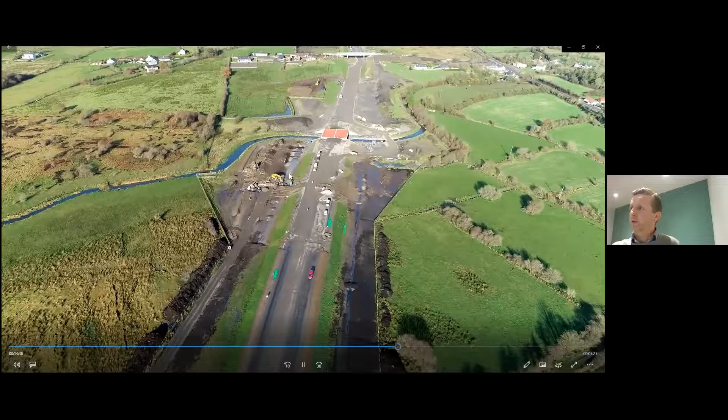Just coming up to the second river bridge here, the Turnaliden stream, structure 5, wetlands coming down towards the stream. Similar construction to structure 8, similar span, reinforced earth structure.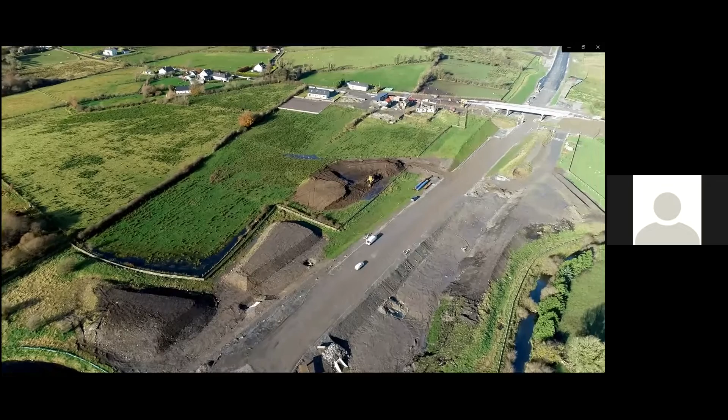Just a question came in there, Sean, about borrow pits. Are they all within the LMA? I presume you can answer that, Sean, yourself, but they are all within the LMA anyway. Yeah, everything is within the LMA. All borrow pits and all site won material was generated from within the LMA.

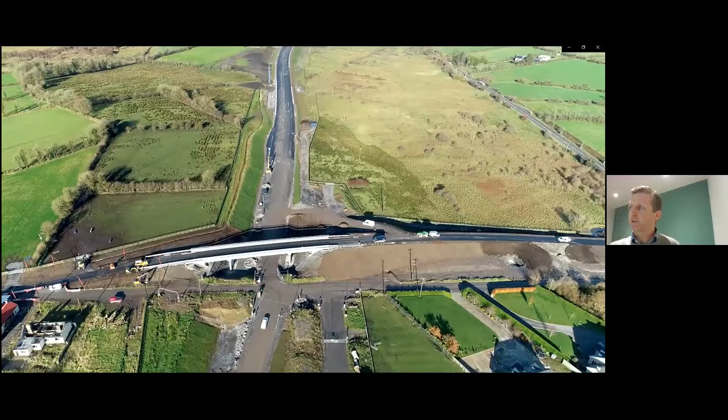The CBGM, Brian, I believe, was delivered. With some of the larger schemes, you'd see the CBGM being produced on site with on-site batching plants as well. But we didn't have very significant quantities of rock on this scheme, and I suppose it was generated from a local borrow pit in Ballisodare.

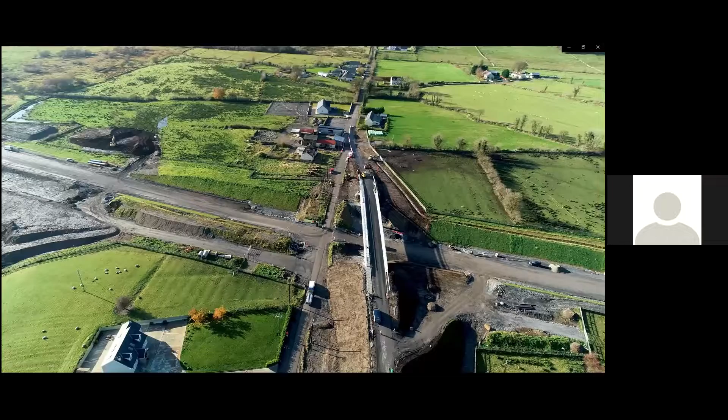Structure 4 we just passed over, so one of the overbridges. The 3-span structure. You'd see some of the motorway structures are 2-span structures. 3-span, if I recall, was dictated as part of the works requirements. 1 large span and 2 smaller back spans.

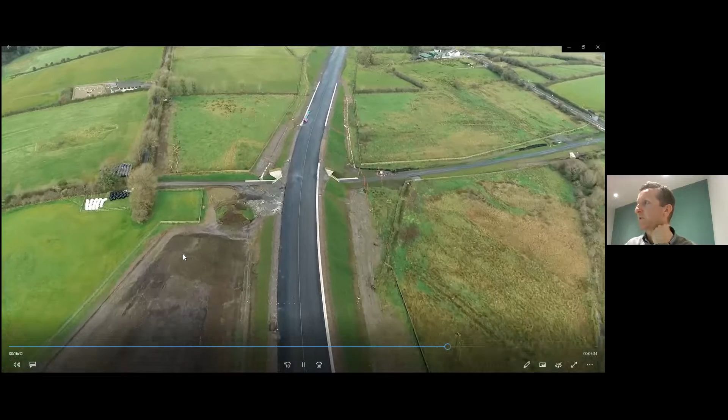Okay, deposition area just there on the left. Hey, Sean, one of the questions that came up on the chat there might be worth just mentioning now as well is the safety barrier, the median safety barrier. Any comments on what's going in? Obviously, you don't see it there at the moment.

Yeah, double-sided steel safety barrier. So again, on the motorway schemes, you'd typically have a concrete median, or you would have in years gone past. So this is a Type 2 dual carriageway double-sided steel. Okay, thanks.

With the narrower cross section, you don't have drainage in the central median. So when you are super elevated, water does go from one side to the other. I did actually have slides in the presentation just about designing for transitions and checking for water film depth,

but cut them short because we're already 20 minutes over time here. So apologies for anybody who's waiting for their dinner.

We're just coming past the tie-in into the N4 here. So this is the eastern parallel link that you see the traffic driving on there. As I mentioned, this section, the Greenway is effectively as per specimen design, and then we've taken it off. Probably a fair bit nicer for users to be just a little bit separated, a bit further away from the traffic at the early junction there.

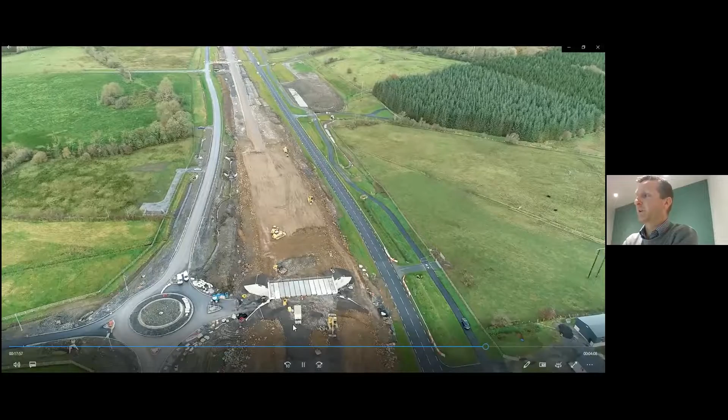Ryan, when did you start the works on that underpass? For those familiar, those driving by, they've probably seen it happen, but for those not familiar, it's a case of get the traffic off the N4 and start those works.

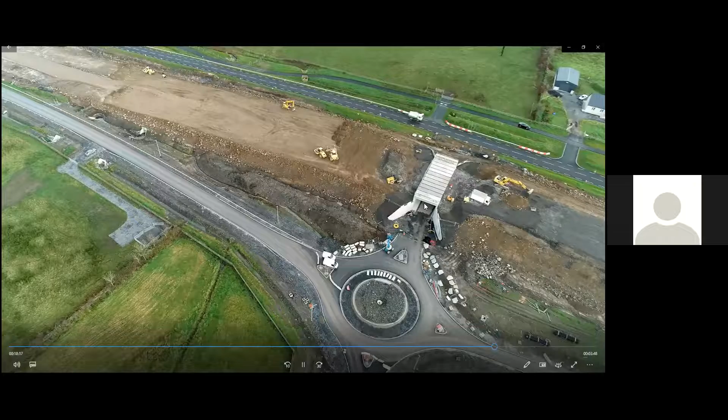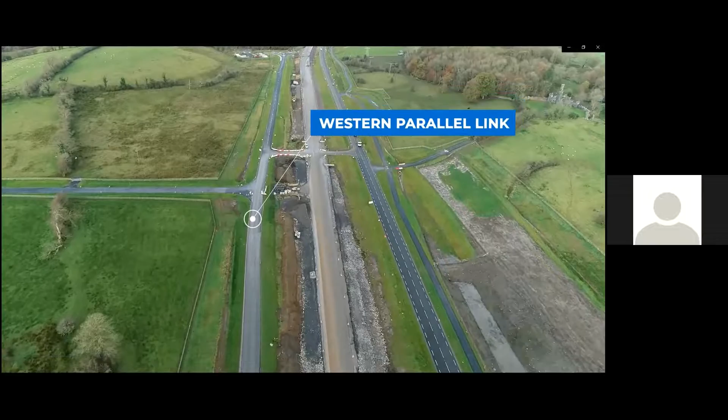Yeah, I suppose these works have well progressed since this drone footage was taken. The traffic, which is currently cutting across our spread, 500 meters north of this point, will be directed back underneath structure 2. It'll be after, but hopefully in January at some stage. That will allow us to close this plug here in the center of the footage where the traffic is currently crossing.

And similar with structure 1, at the moment we're facilitating traffic on the existing road, and the intention will be to divert traffic over the structure in the early part of 2021.

Bernard went through this obviously, but this line here is the western parallel link. Eastern parallel link, which is what traffic is traveling on at the moment. All the N4 traffic is traveling on the eastern parallel link. And you can see the old road obviously is now being closed to traffic and works commencing.

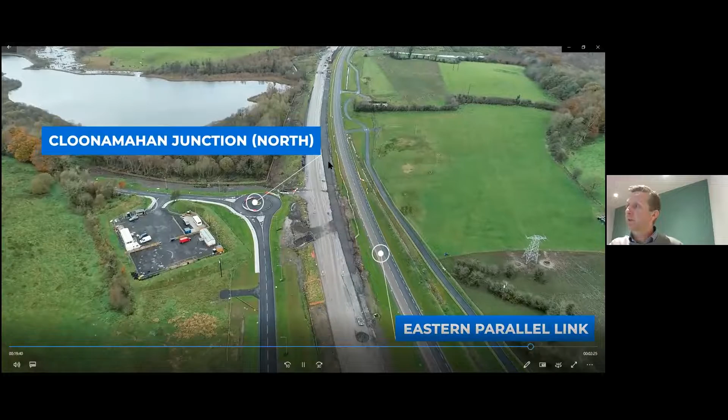So we're just coming up here, and just further up here we can see where the existing pavement's going to be widened. So obviously box dig out for the widened pavement. Test the subgrade, place your capping, test the capping, place your clause 804 material, your subbase material.

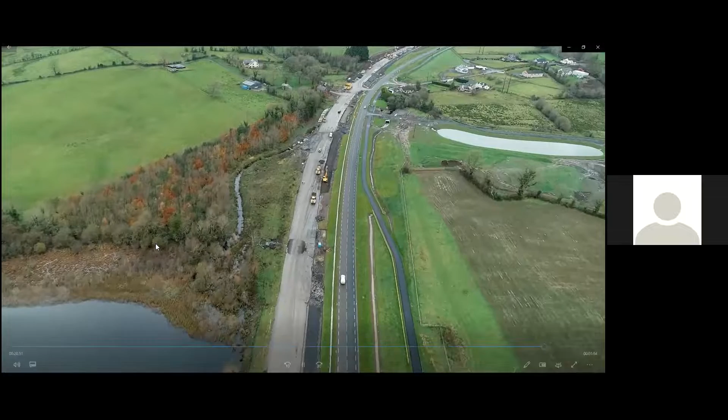So I mentioned in the presentation that on the online section we're going to utilize an overlay design, and just beside it it'll be flexible pavement construction. Just on that area there with Tubberscannon and Lock on the west side, and a number of houses on this side, this particular area was very tight to get a design in the planning stage. You can see everything merges together at this location really.

Yeah, comes in very tight. The LMA comes in tight as well. One of the few attenuation ponds left in the scheme. So I think there's three developed fully as attenuation ponds, with all the rest of the scheme using linear wetlands.

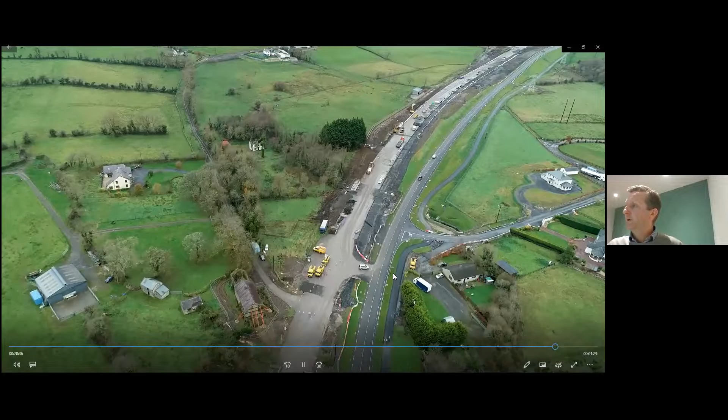So the cycleway is 3.4 kilometres. I just see a question came in on that there, from Tubber right up to Dorney. You can see it rising up with the existing ground here, so you're kind of over the EPL here. The berm constructed in there just for the safety of users.

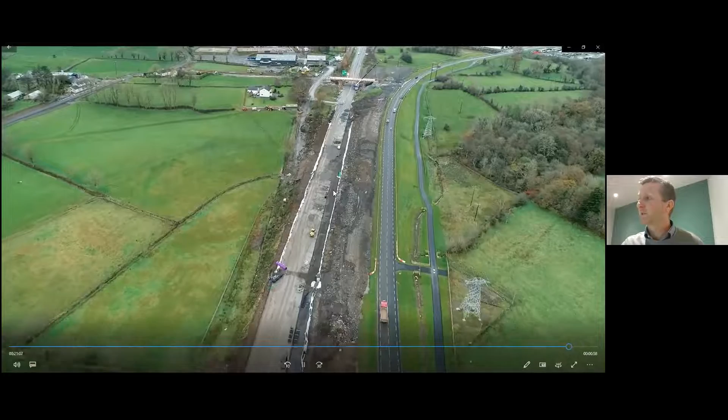Just on the online section, you can see all the works going on there at the moment. This is all the widening. The alignment was amended during the tender and detail design to keep all the widening to one side insofar as possible. So the outer verge here, effectively the position of the verge gets to stay the same, and all the widening's on one side. So all the ducting works going on at the moment, drainage works going on at the moment.

Again, this is structure 1, Brian. Again, you wouldn't have started that all that long ago. Yeah, again, works are progressing at the moment.

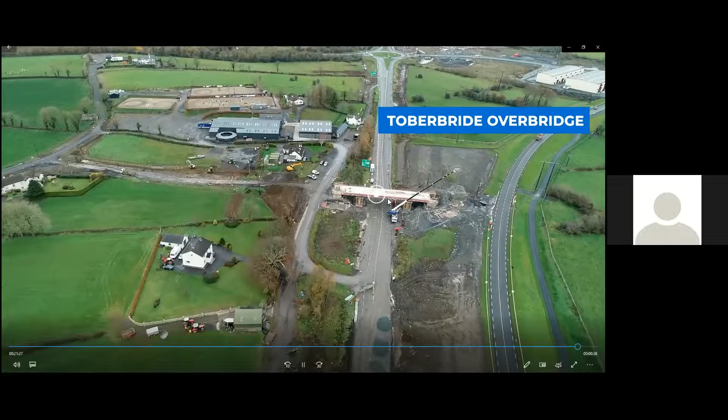Obviously the existing N4, N17 Collooney roundabout here, so the N17 is just down there. This is the east-west link that Bernard pointed out earlier on. Toberbride East Junction and Roadbridge's compound and their famous canteen just in here. That's it. Okay, I'll hand you back over.

Yeah, very good. Sean, Brian, Bernard, thank you very much for that. Great presentation. Gives us all a great feel for what's involved in delivering such a large scale road scheme. After watching that aerial tour of the site, I feel like I've actually seen the whole thing myself. So it's not a bad substitute for the real thing. I suppose it's one of those iconic projects that we'll all be benefiting from in the region for generations to come. I think Bernard Mulhern has a comment up there. It's the gateway to the northwest, which it really is, and it's another key piece as well of the upgrade to Ireland's strategic national road network.